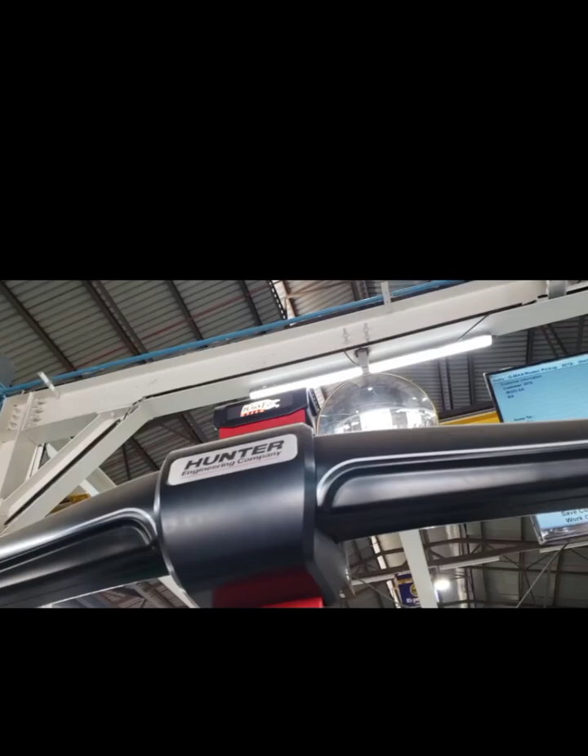I want to teach you how to do wheel alignment using the Hunter engineering machine. This is the machine that we are going to use. So the first thing before we do anything else, we need to wear safety gear.

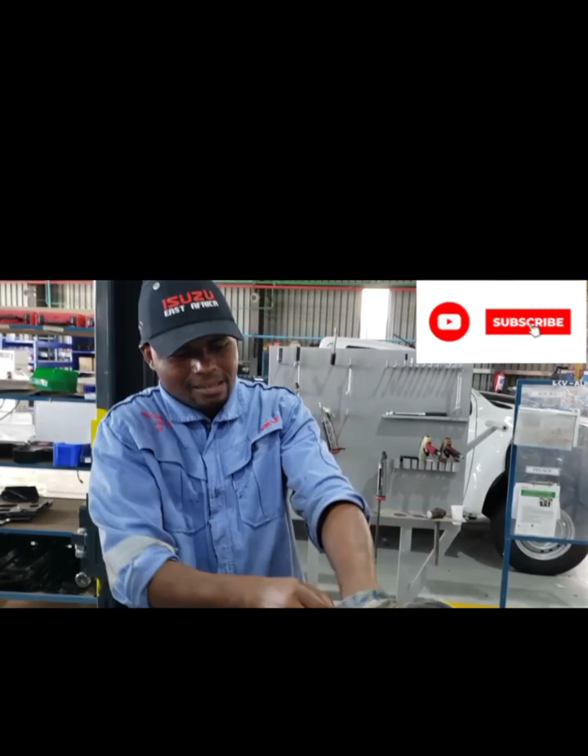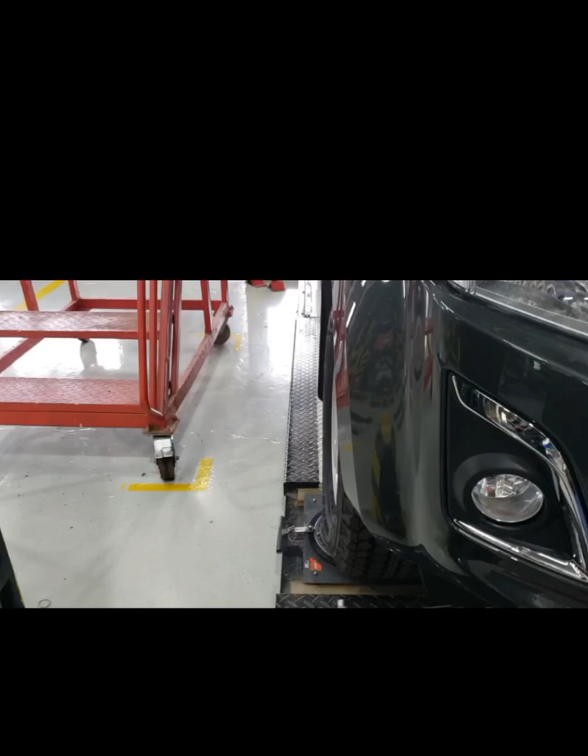This is my cap, courtesy of Isuzu East Africa. I wear my cap, then I will wear my gloves like that. So after we have aligned our car on the clamp, we are going to consider safety. So this is for safety, put it here.

This is an Isuzu pickup, Double Cab RC8. So now we do a very simple process.

I know you like it, it's very simple, be clean so that you don't miss anything. Now that's the good height for me, so that I can be able to put the target.

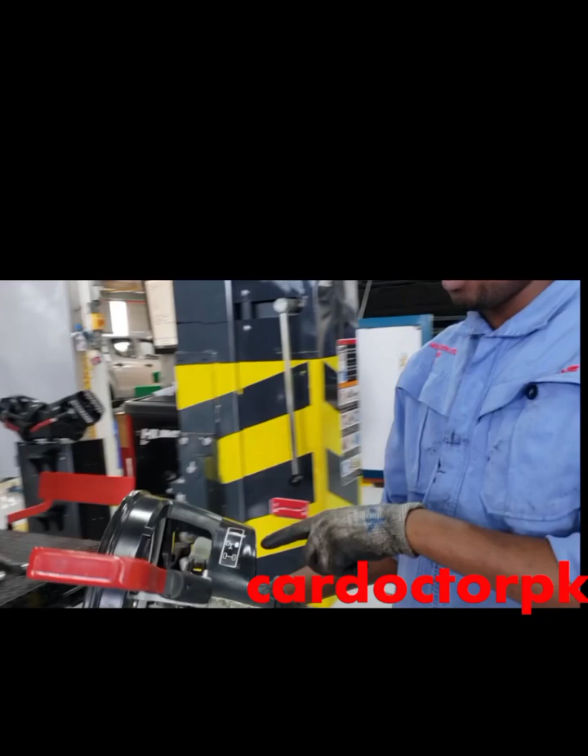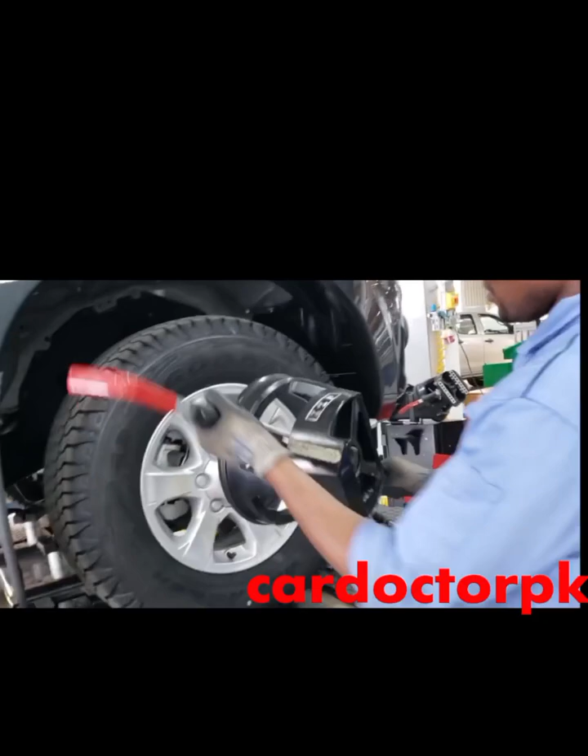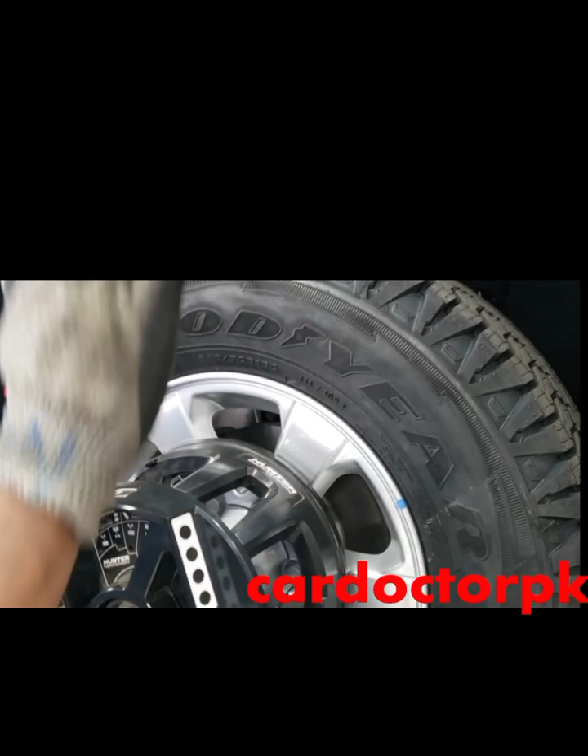This one is written and it has a drawing. This is for the right front wheel, and it also has a label here, right front. Like this. You make sure that it is at the center of the wheel, like that. At least we try to focus on the target sensors, then we do there.

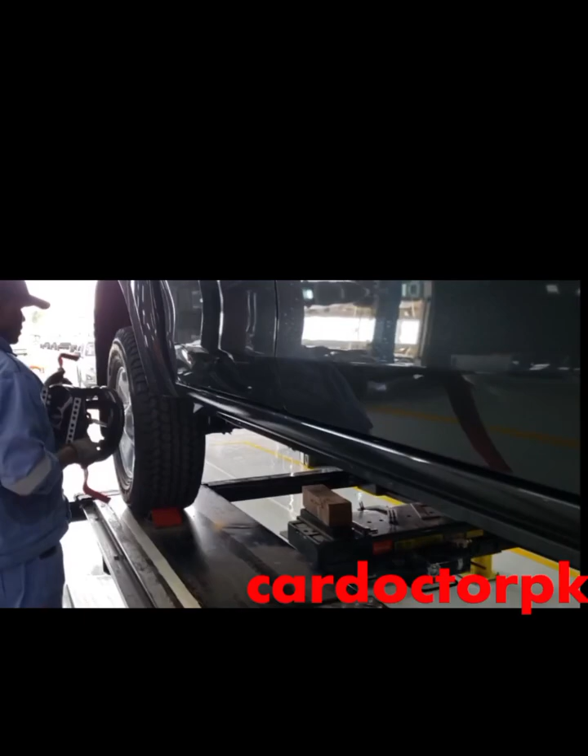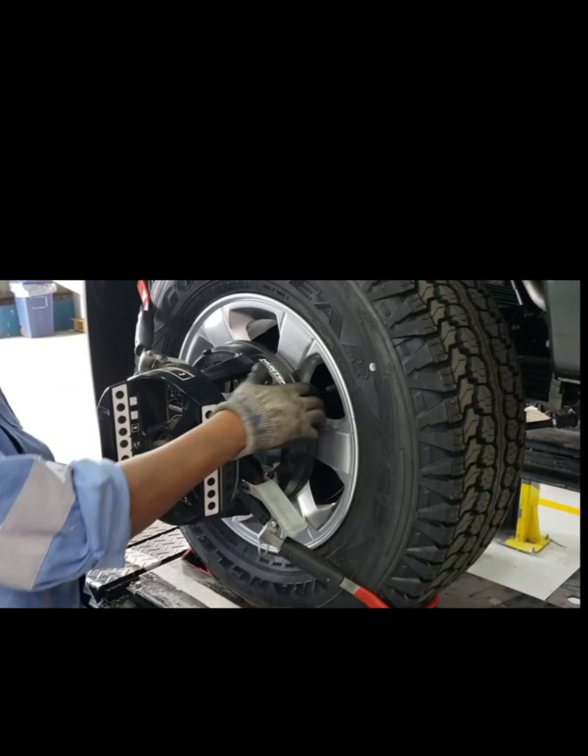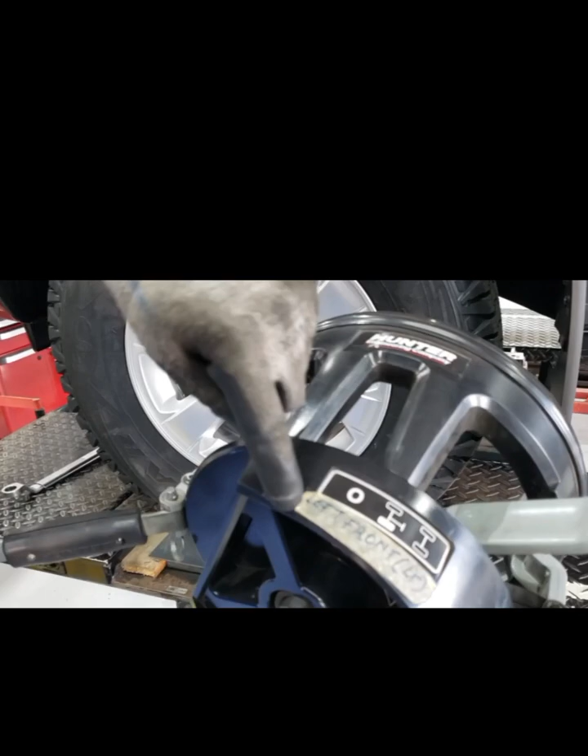Make sure that it's at the center of the wheel, like that. So we go to the other side. Check the location, the position of the wheel. It's written left front. At the center like this.

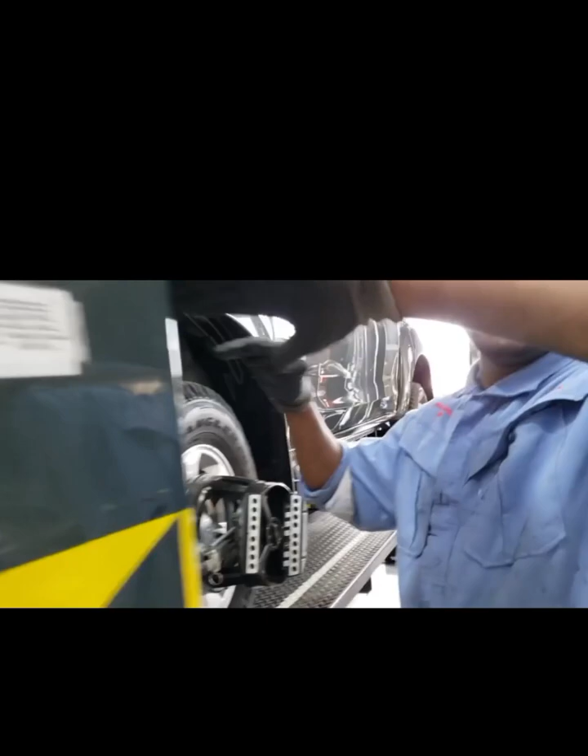Very simple. So when you position your targets, now we lift the vehicle to a desirable level where you can conveniently do the alignment. So you lift it at the desirable height. For me, I think this height is good, so I'll lift it up to here. I'll put this mark to help me. So now one is good.

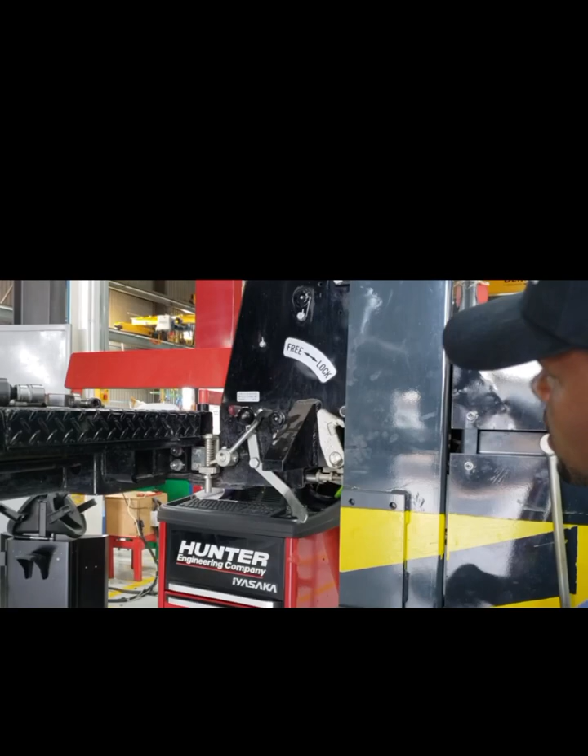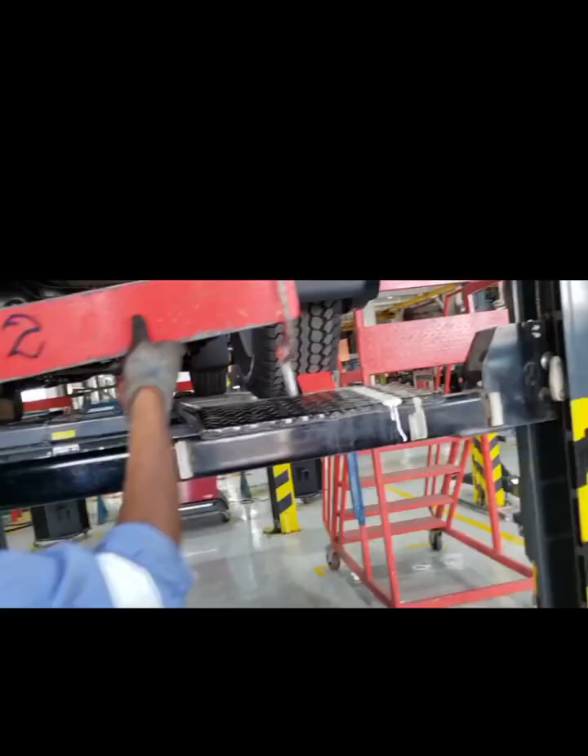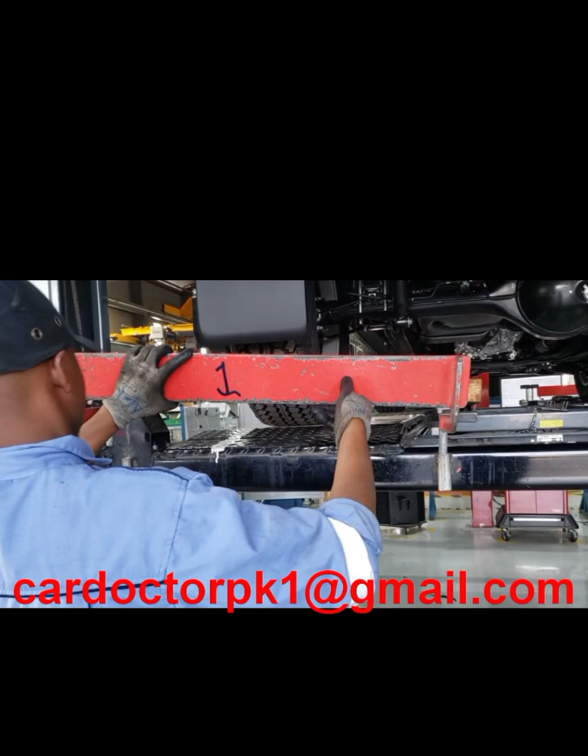Then you also put other stoppers behind, this one. So you are ready to go.

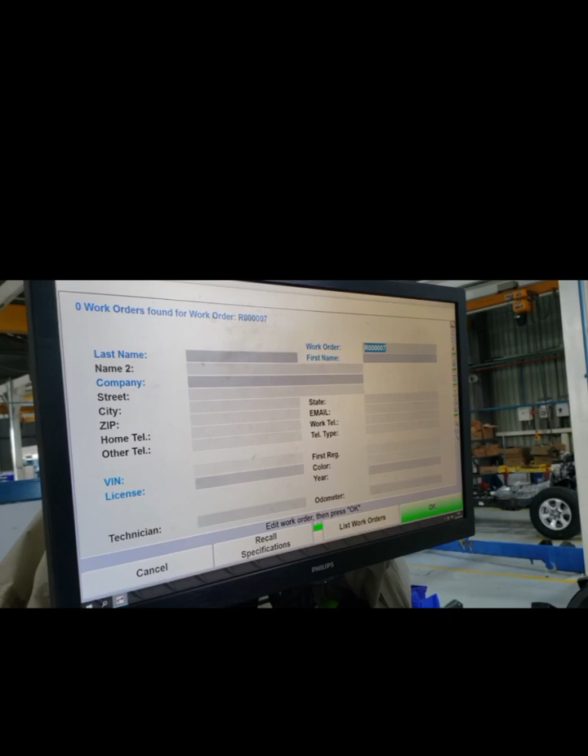So now you come to your software and begin alignment. You need to feed this area. For this case, last name is East Africa, company name is Isuzu East Africa RC8 because it's a double cab. Then this is lot 83, this is job 12.

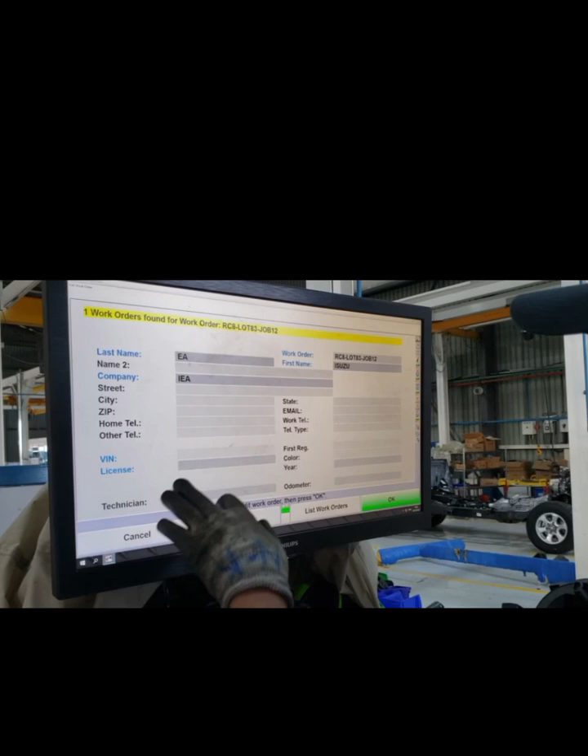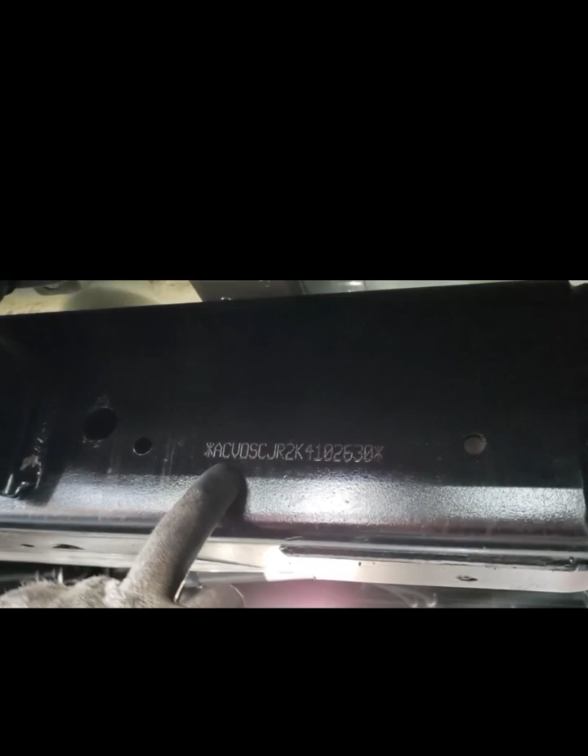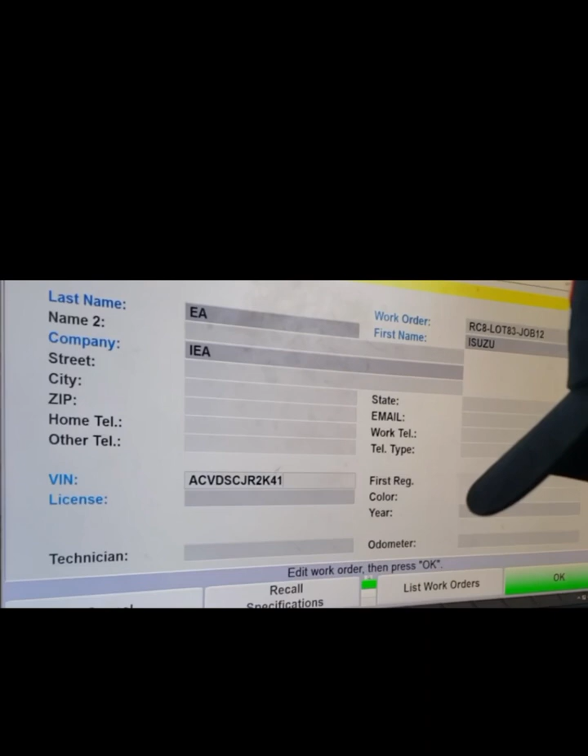So this is the VIN. This VIN now you have to read from the chassis. Let me show you where it is written. I don't know whether you are capturing it. VIN for this one is ACV DSC JR2K 4102630.

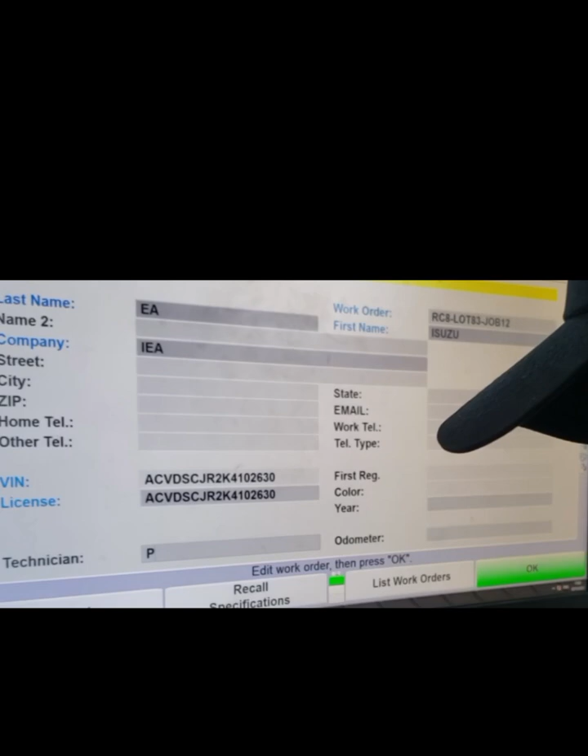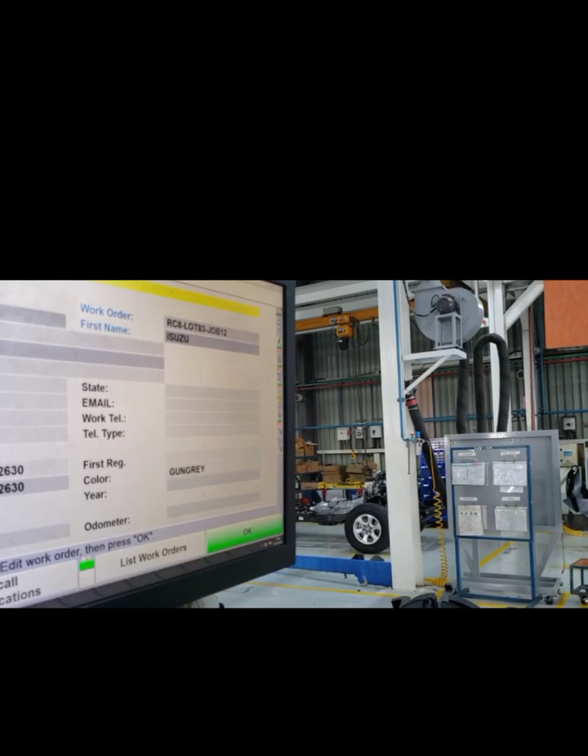Copy, paste it here. So here you write the name of the technician. Then come here, the color for this car is gun grey. Then this car is for year 2019, and the odometer, because it's a new car, is 1.

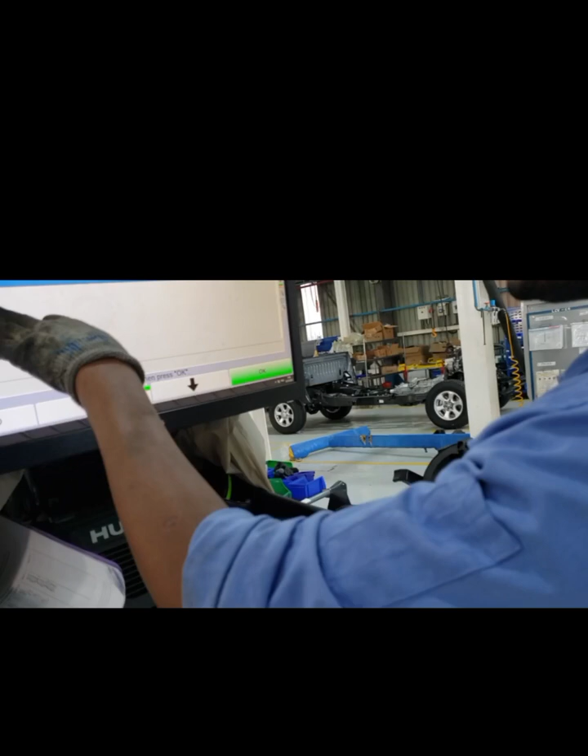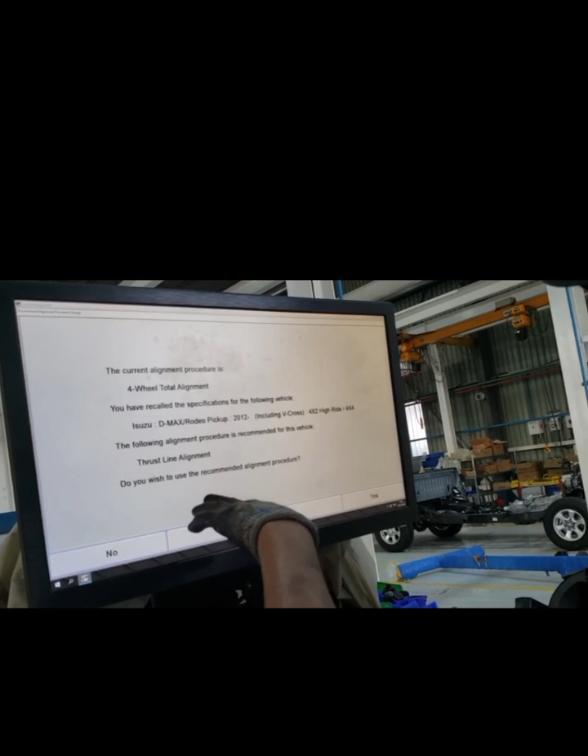You say okay, so this is Isuzu, D-Max, pickup, right, V-Cross, okay, High Ride, yes. So these are the credentials. This one is okay, then you continue.

So you mount sensor, already you have mounted sensor. Then we jack up the wheel and we do the compensation. Then we say ready, so let us jack the wheel and we do our compensation.

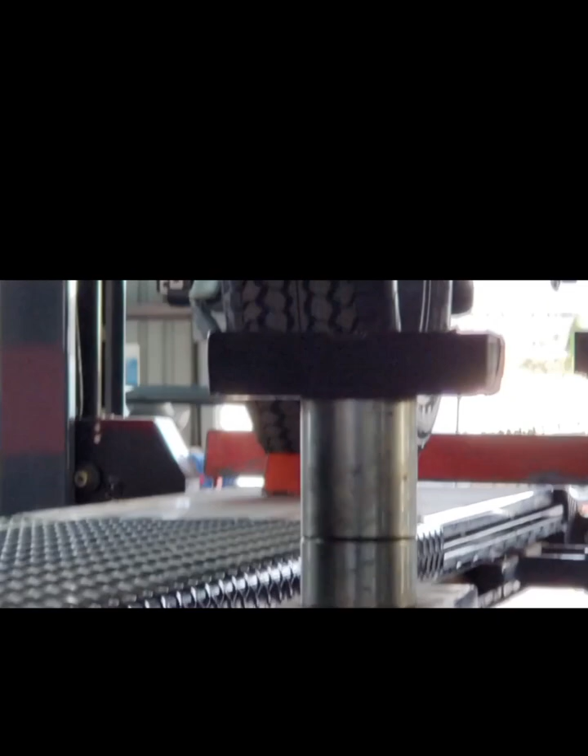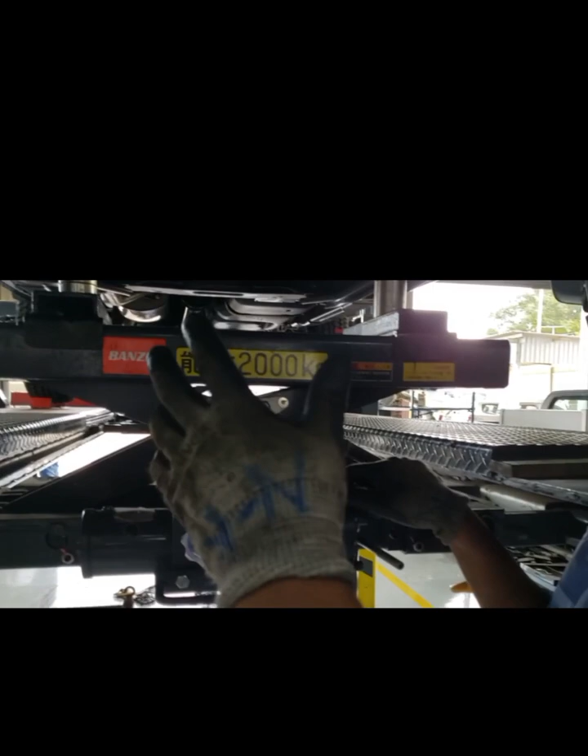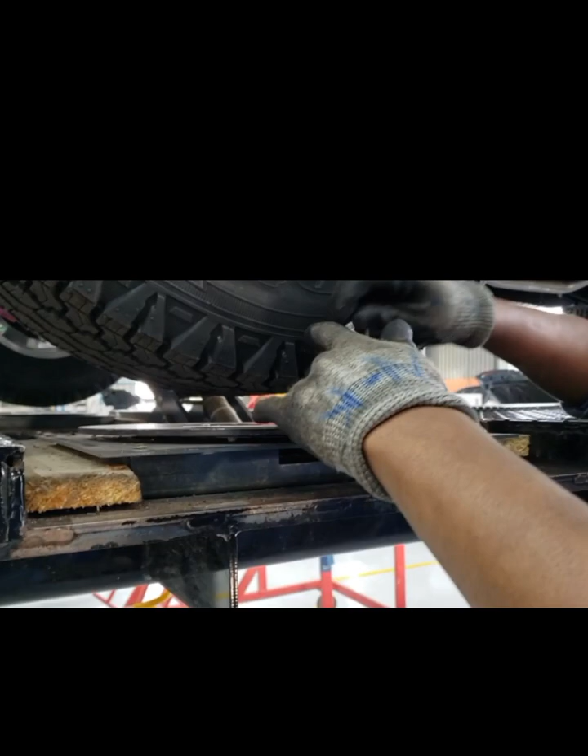You make sure that all wheels are floating so that you can be able to do compensation. That one is floating, so that level is okay. Now let's do compensation, we start with this wheel. The first thing is to remove this pin like that.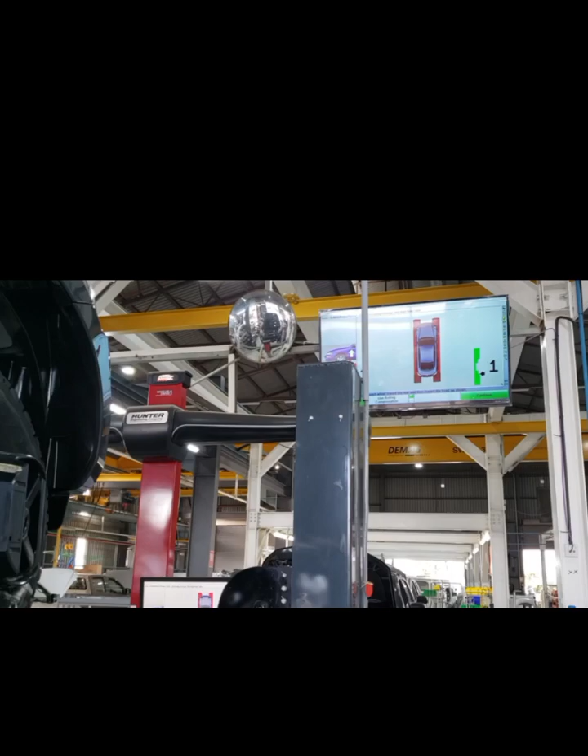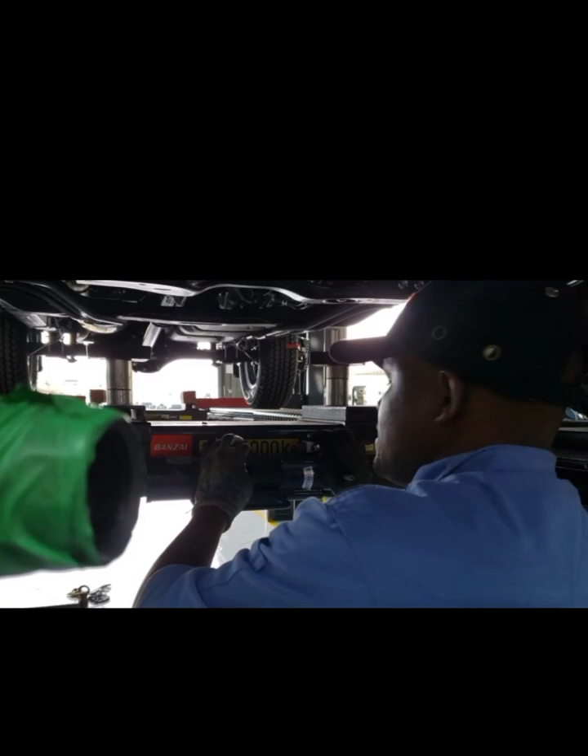So now what we do, we say ready. Now what we are going to do, we are going to measure the caster. We say okay, then let's go up there and measure our caster.

So now we take this one first. This is for the brake, then this one for positioning the steering. Before you do anything, you brake. You install this brake pedal, you press the brake, then you install this like that. Right, then you come.

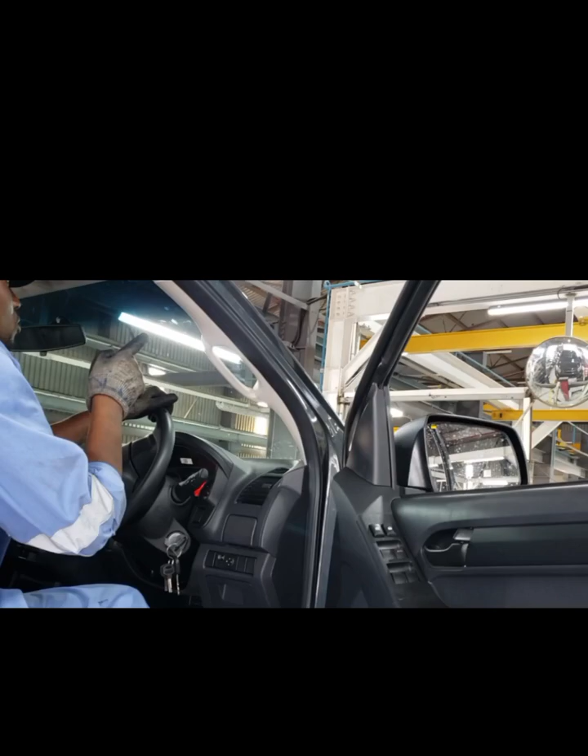What you are going to do is rotate this steering in the direction given by the system, that center, opposite direction, as the arrow shows you.

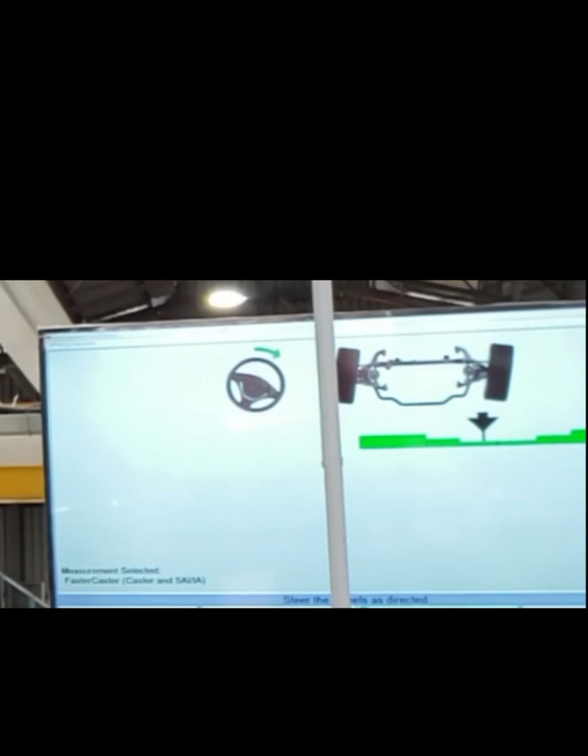So after that we save the before measurements, to give us a difference between the initial and after measurement. So we have to save that. Then you click ready.

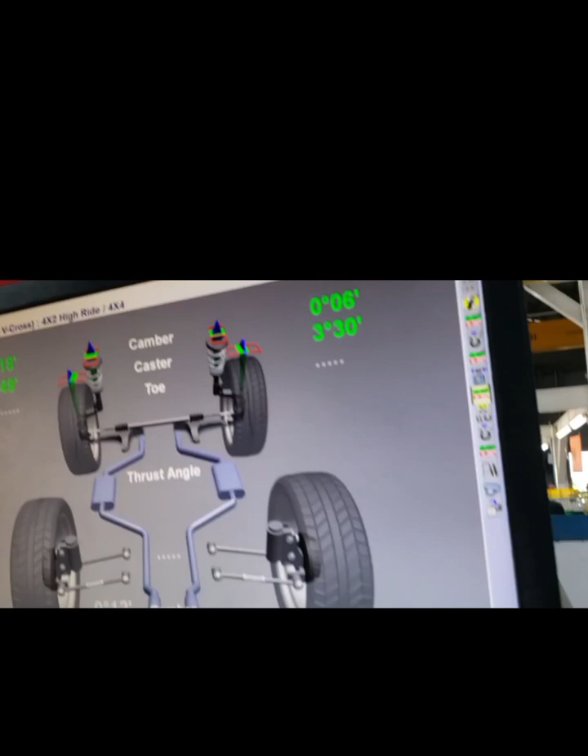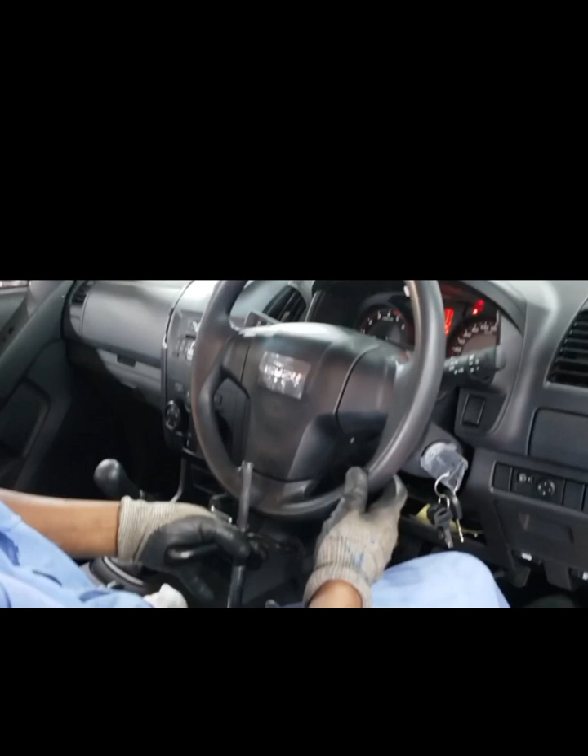So now after you have saved, then you set this steering. You make sure that the steering is straight, in straight position like this. Make sure that it's straight. Then press this lock, and then you push. Press, then push like that. So your steering is stable, it will not waver.

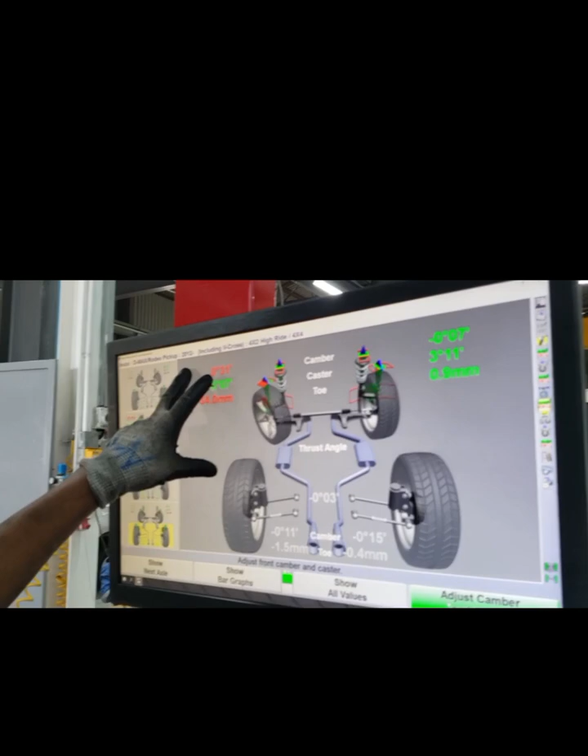Switch off. Then we go do the adjustment. So now these are the prior readings, the initial readings of that vehicle. What we want to do is adjust these angles until those wheels are aligned. So here we have camber, caster, and toe. We are going to work on all 3 of them.

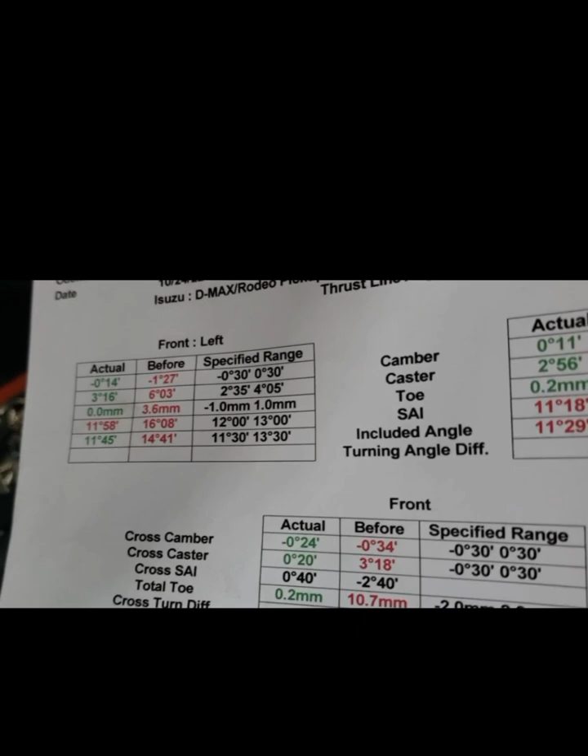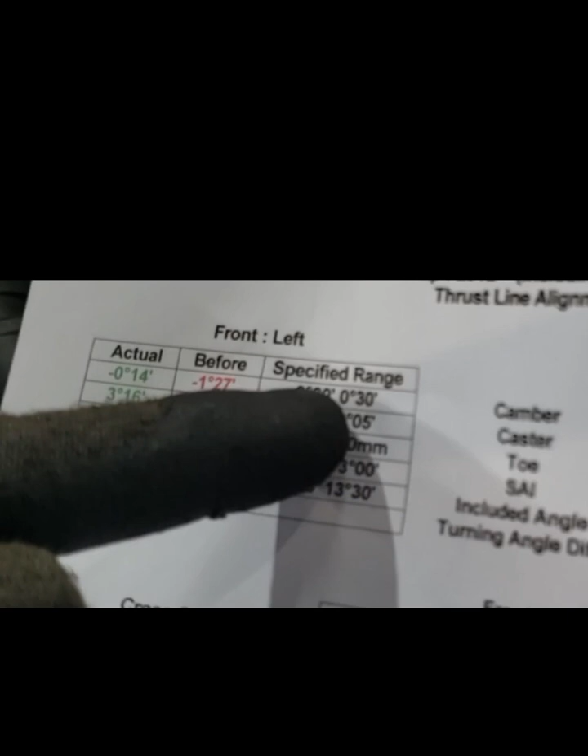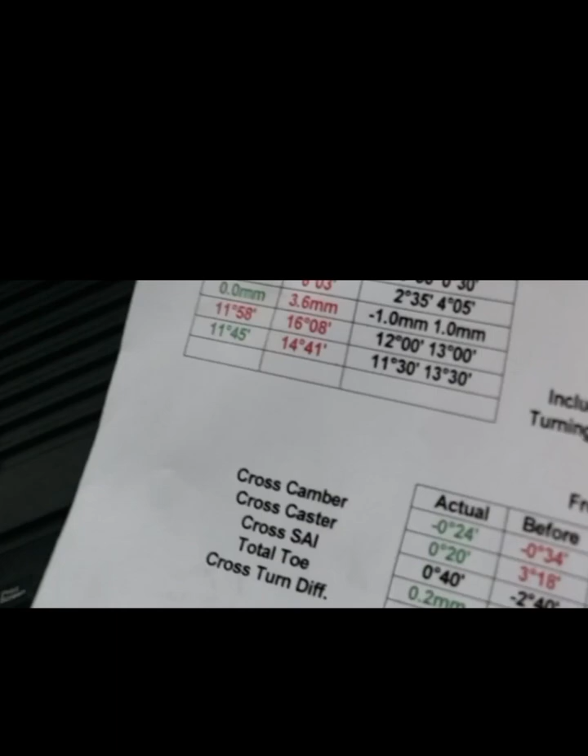So for camber, I'll show you something. The range for the camber on both sides is supposed to be between negative 0 degrees 30 minutes to 0 degrees 30 minutes. Caster is supposed to be between 2 degrees 35 minutes to 4 degrees 05 minutes. And the toe, we have said that it's supposed to be as close to 0 as possible. So that's good, it will give us the direction and guide us.

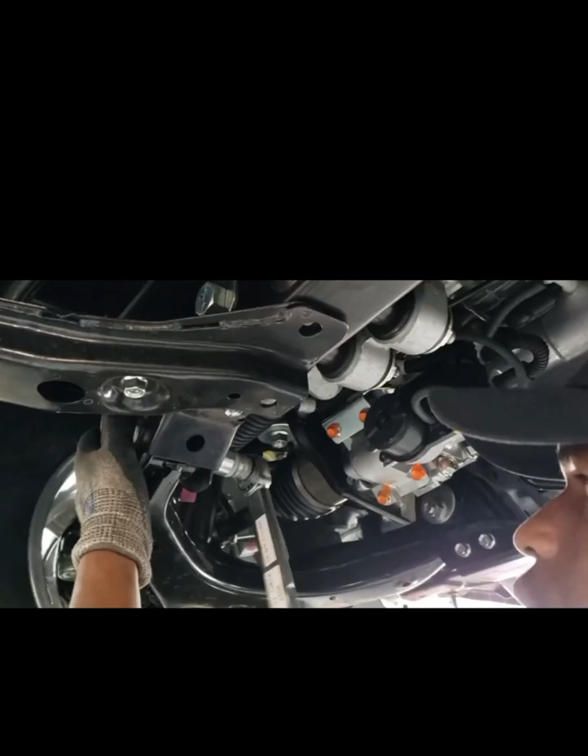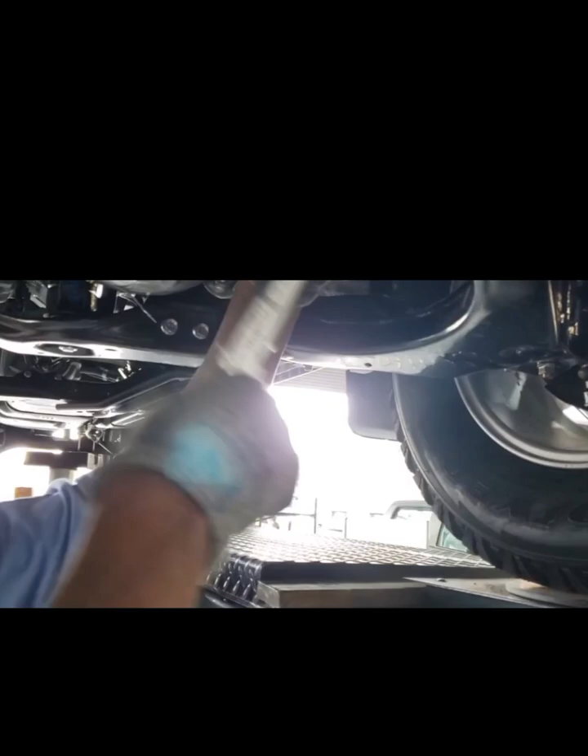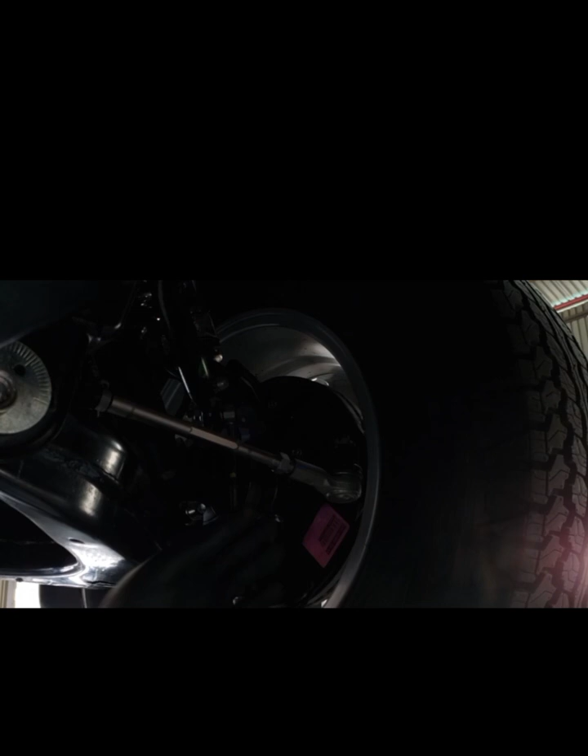So now you come here. For visibility, you can use this graph like that, so that it is visible. You can also choose this wheel, or you can choose this, whichever you want. So for us, let's use both.

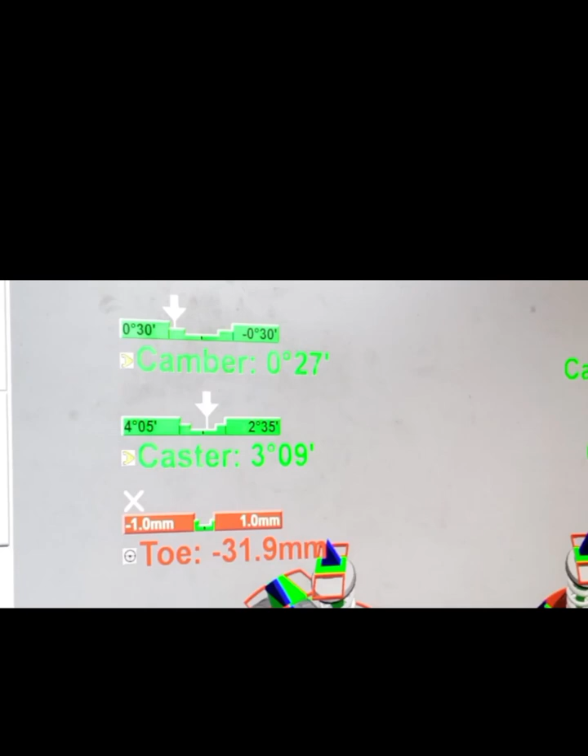We're going to do our left hand camber, placing it at negative 10 minutes. Our caster is going to be an average of 3 degrees 20 minutes. And the toe is going to be nearest to 0 as possible.

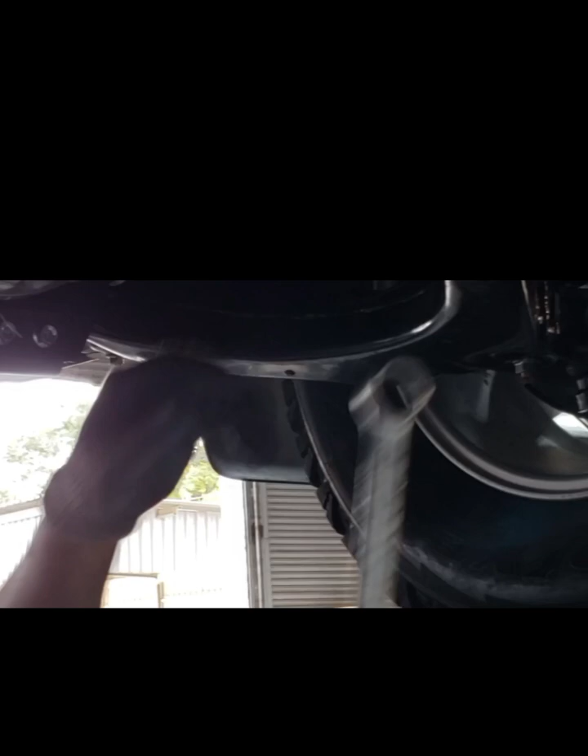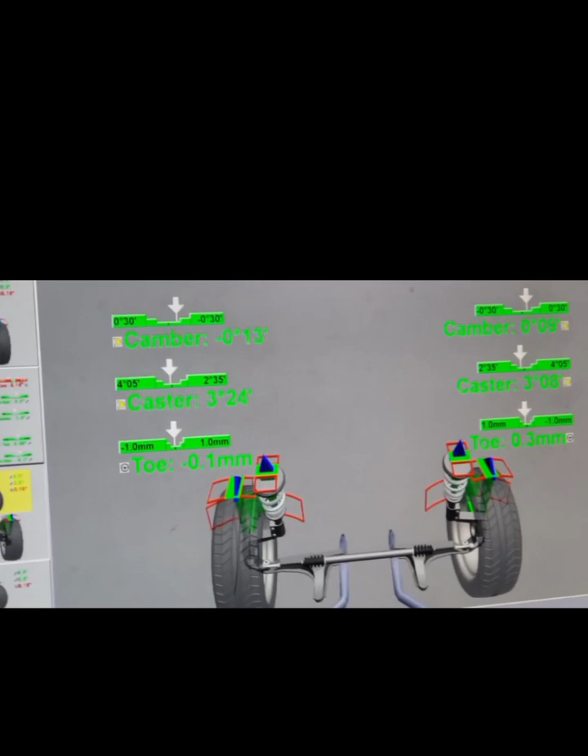So let's start with the left side. So now it's reading 27 minutes. This one on the right, we will do adjustment. This, that caster.

So now you can torque, you need to torque.

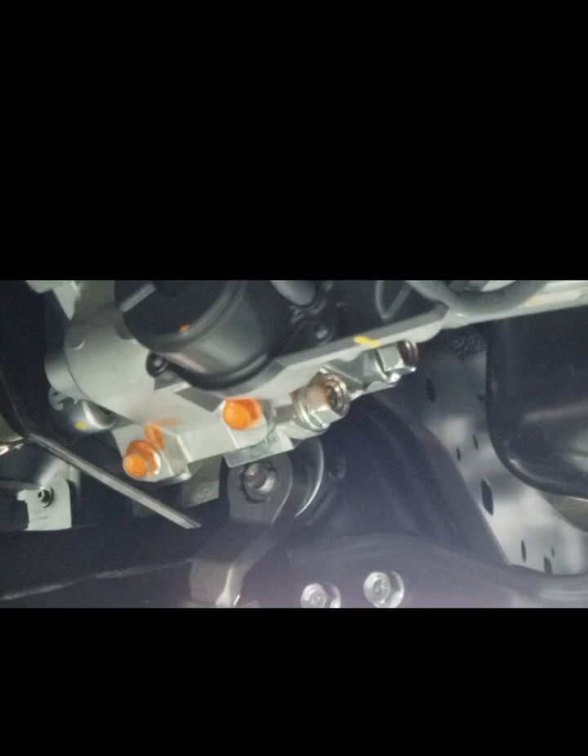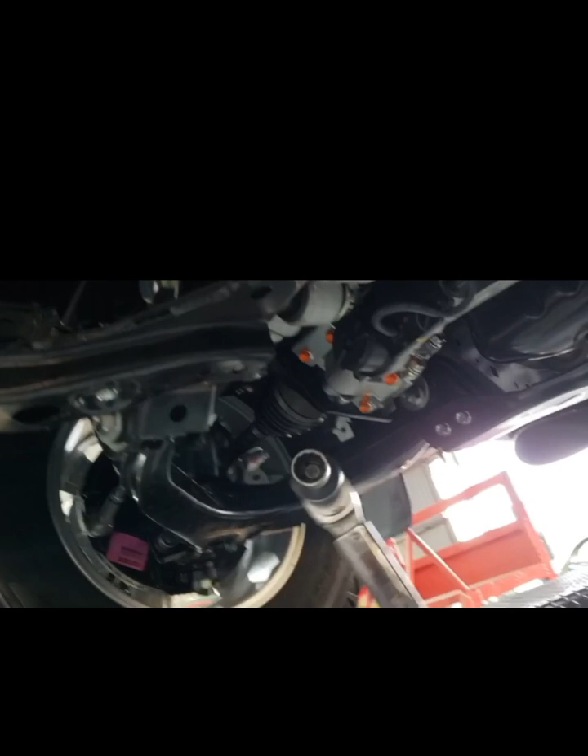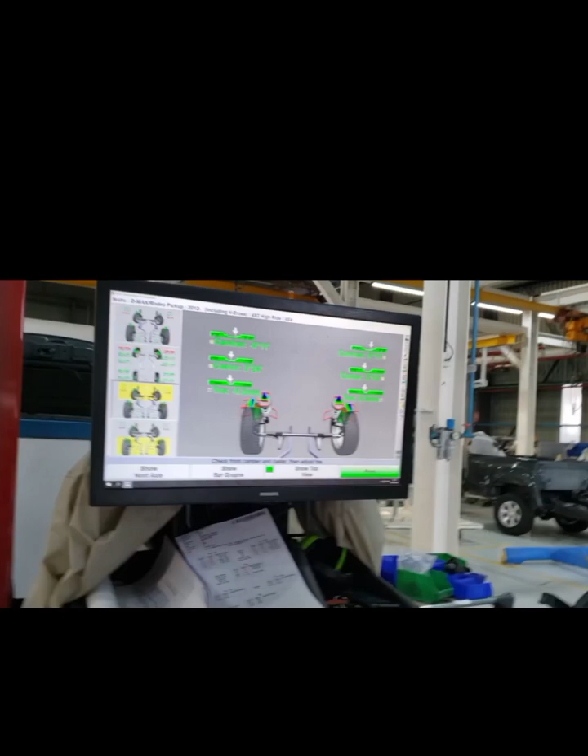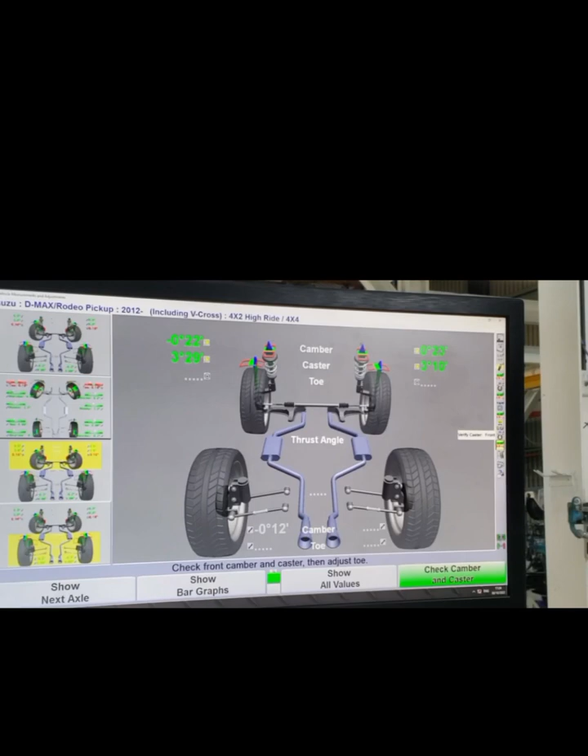So now, what we are going to do is verification again. So you come here, verify. And you see. So now, this is good.

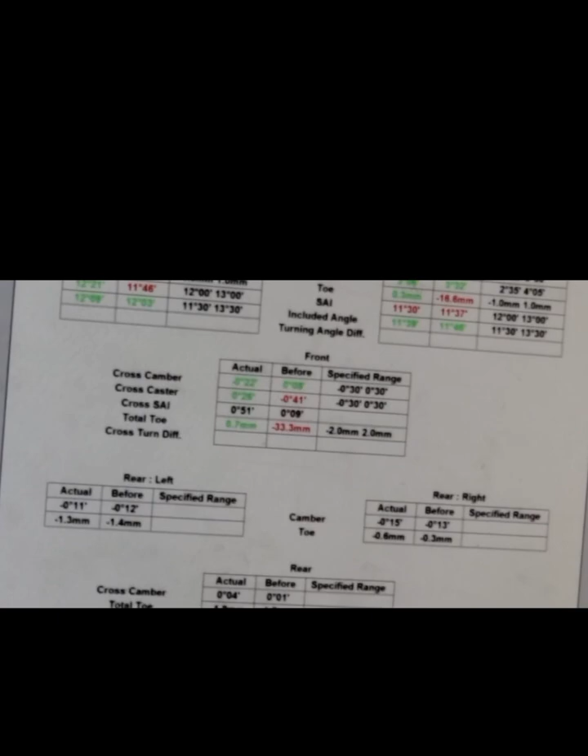If you go now, let's go and check our printout. Come here to the printout. So, to highlight, the steering wheel is currently level. Then we print summary. So now this is our summary. You see? Zoom in, so you see now the cross caster is 0 degrees, 26 minutes.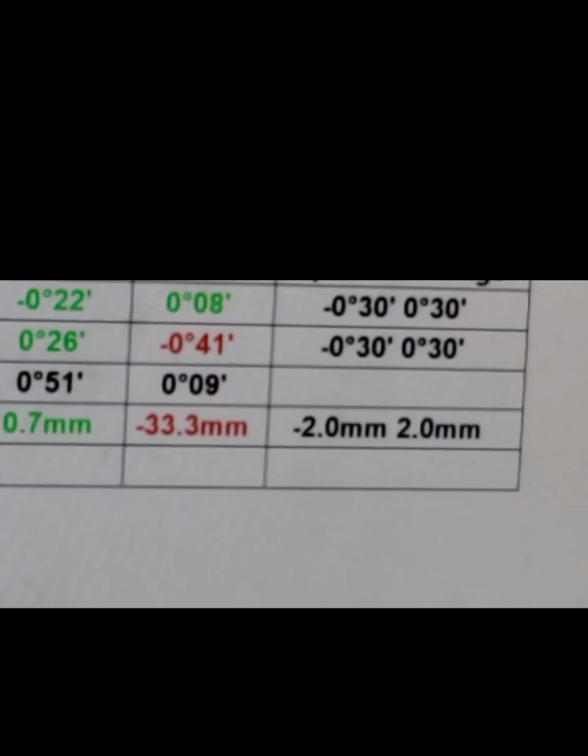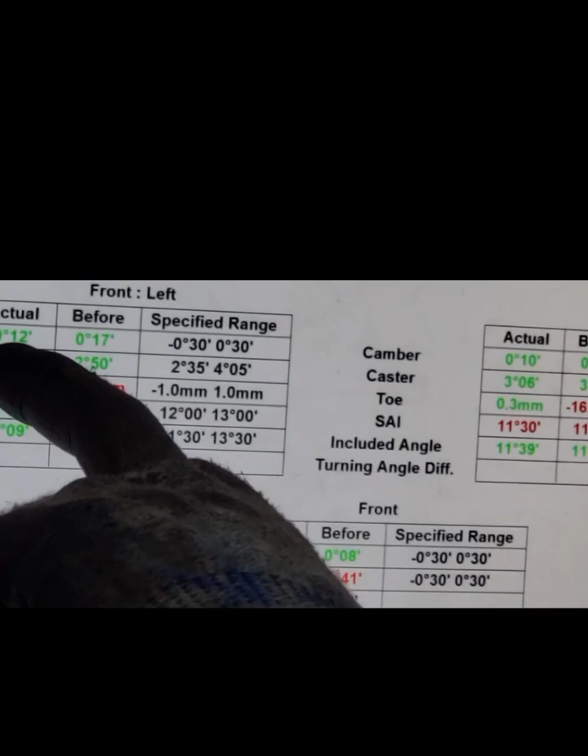But we said we needed an average of 0 degrees, 25 minutes, and now we have 26, that's fine. So if you check the cross camber, it is the difference between the camber on the left and the camber on the right. So if you take this difference, negative 12 minutes, and subtract 10 minutes, it will give you negative 22 minutes.

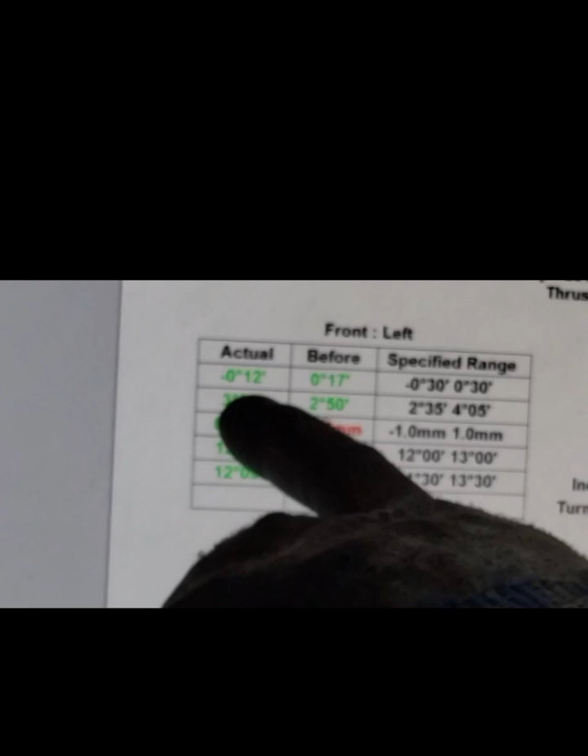That one is fine. So cross caster is the difference between the caster on the right and the caster on the left, when ordered exactly. So that difference, this one, that one is good.

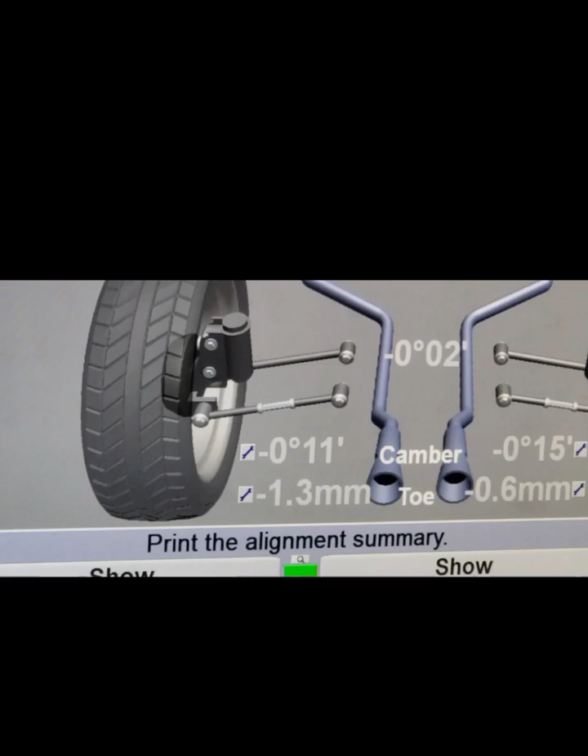So now what we want to do, we need to adjust this toe. We said that this toe needs to be as close as possible to 0. That's our last step. So now we come, and you can also view, even if you look at the physical appearance of this wheel, look at it. You can see now this wheel is aligned.

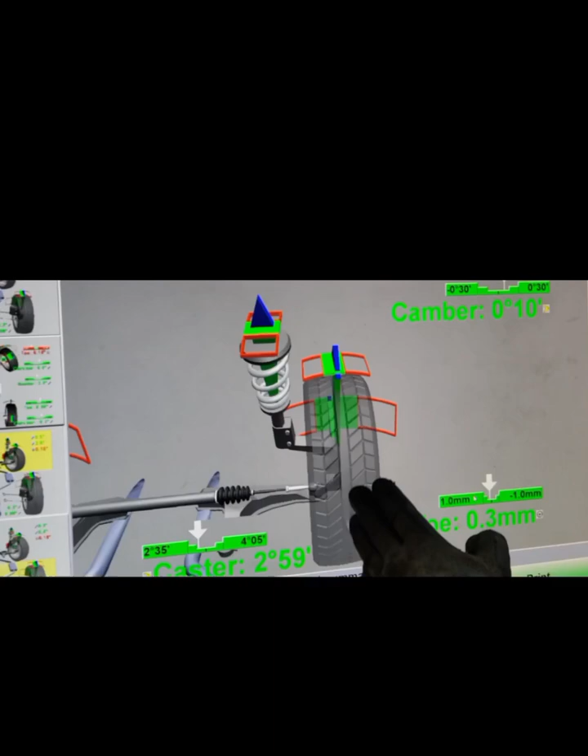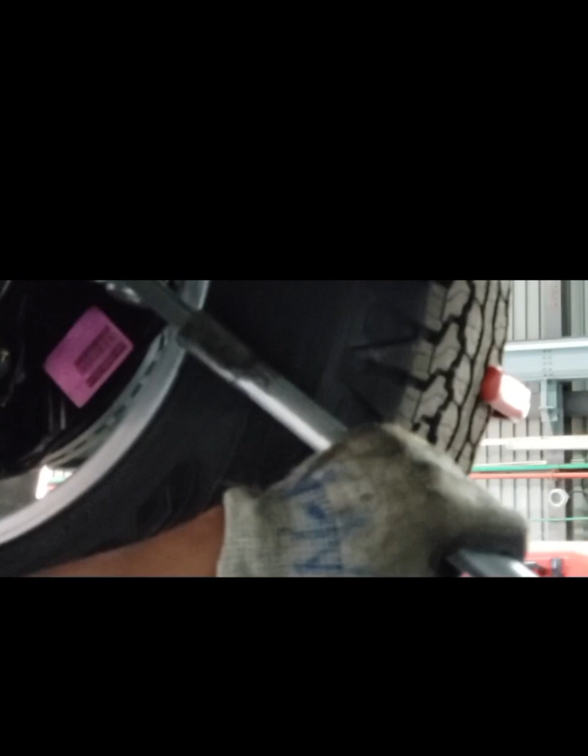When you come to this, look at it. It's good, it's aligned, yeah. So now let's go and adjust our toe. Our toe, we said it should be closer to 0, as close to 0 as possible.

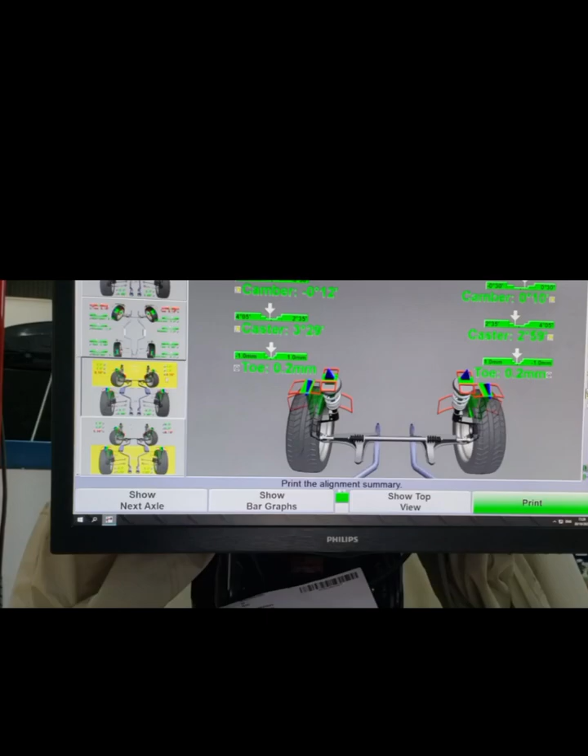So now, just the left side. Should make sure it's closer to 0.

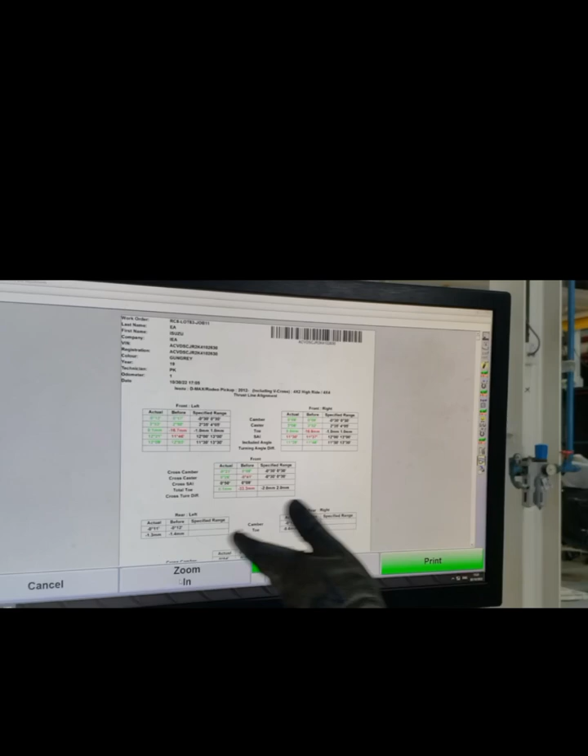Then it's good. Do the printing. So you say the current wheel is level. Then you print summary. So this is your summary, it's fine. So you say print. And you are done with alignment.

Right? It's printing. So as we wait for the printout, let us...